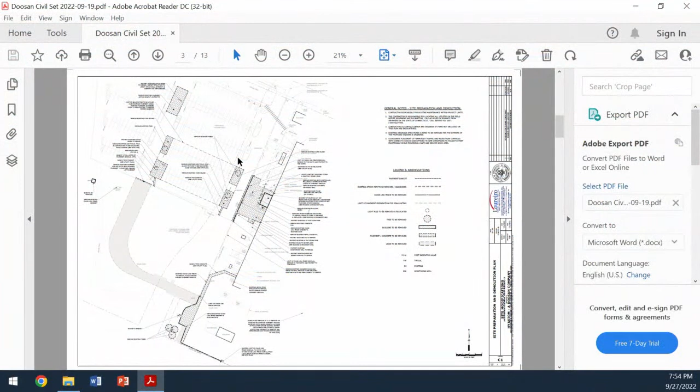To begin, I'm just going to show the existing conditions survey. So this is a little bit unique. Basically, the project area is divided amongst three adjoining parcels - 125, 155, and 195 Governor's Highway. But 195 is the property of the subject building. So basically, we're in the I, the industrial zoning district, and this just shows the existing conditions of the site.

So just real quick, the 125 parcel is a majority of the existing parking lot and the lawn area to the west. The 155 parcel is this narrow strip - basically the eastern drive aisle of the parking lot, which opens up into the rear of the property where there's some woodlands. And then the 195 parcel is the small amount of pavement directly adjacent to the building, as well as the Doosan building and then the eastern parking lot, which is off the view of the sheet.

So for the existing conditions, we have a large asphalt parking lot, some small landscape islands, existing lighting out there, and an existing on-site drainage system within the parking lot. It has one outfall to the existing municipal storm sewer in Governor's Highway, and it has one outfall that goes to the west, which is presumed to go to the surface water west of the property. And this area here is currently lawn, and as I mentioned, beyond here is woodland.

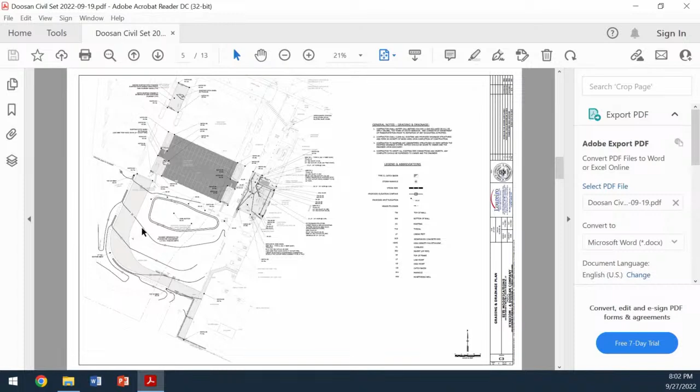As I mentioned, we did incorporate the stormwater quality measures, and there's no changes to any other outfalls, or any addition of new outfalls. We're just basically tying into the existing trunk line with our new drainage system. And the grading in the lawn area has been graded to pitch to that basin as much as possible. Whatever does not enter that basin will just continue to sheet flow into the parking lot as it currently does today.

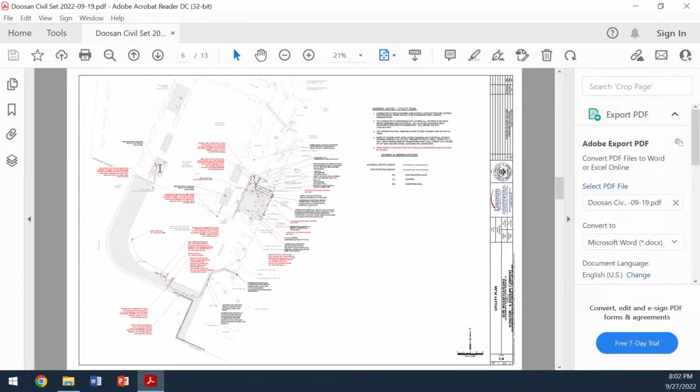Utilities, this is pretty limited. We're just going to be showing conduit for new light poles. We have 2 light poles here that were formerly inside the landscape islands that we're removing, so we're simply picking those up, relocating them directly across from their current locations to the edge of the pavement. Then we're incorporating several other new light poles to illuminate the driveway area, as well as the new loading area. We also have 4 building-mounted fixtures.

The site lighting is the exact same fixtures, the exact same pole height, the exact same everything, even the same lighting consultant and the same distributor as the poles and lights that are currently in place on the property. So we're matching those exactly in kind to a T.

We are just relocating a PIV for fire protection just to allow us to accommodate the new cooling module pad and the new grade wall. But that's simply a relocation from the building connection. And just ancillary conduits for the gate controllers for the slide gates and communications for the intercom systems associated with those gates.

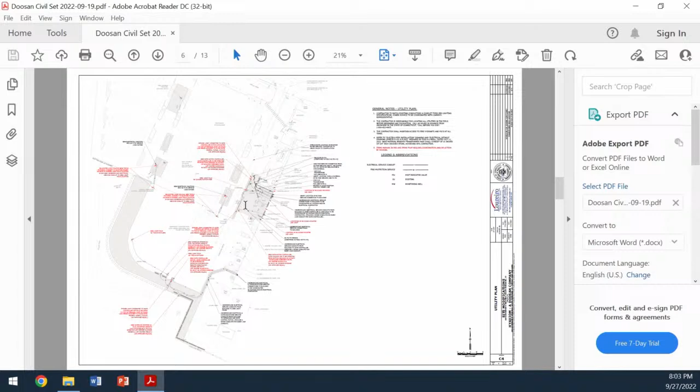This is the erosion sediment control plan. As I mentioned, we did already obtain approval on this from the Conservation and Wetlands Commission. It's basically just a standard plan - we have perimeter protection, compost socks along the down gradient portion of the work area, erosion matting on the steep slopes, designated stockpiling locations secured with silt fencing, and silt sack inlet protection on all new or existing catch basins that are within the project area and will receive runoff from the work area.

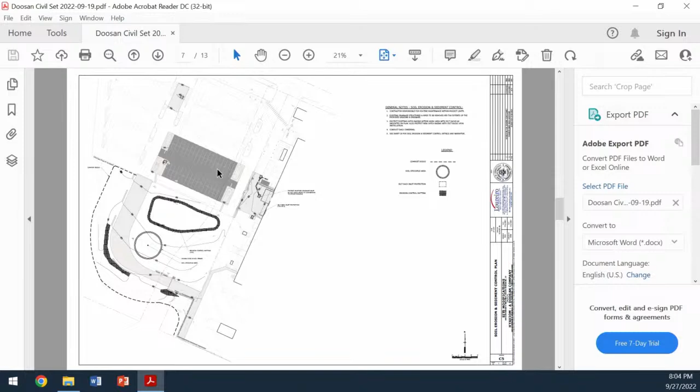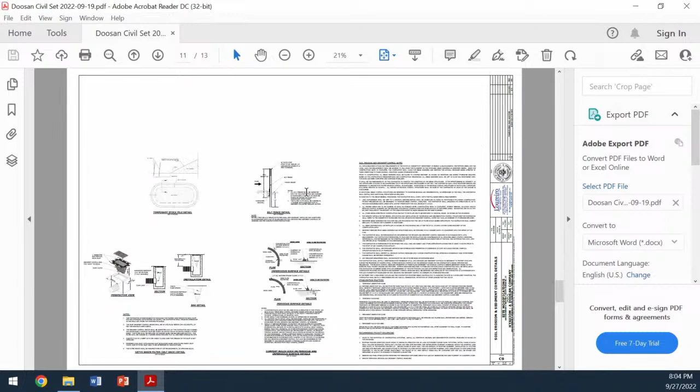These are just some standard construction details. I won't go through these in detail, but it's basically just showing you the different components of the project and how they're going to be constructed. This is just an example of some of the equipment that we're going to be implementing.

And this is the site lighting plan. What we had the lighting consultant do was analyze the entire work area and incorporate both existing and new poles into the analysis. The intent here was to demonstrate that we don't have any exceedance over the property line of 1/4 of a foot candle in accordance with the regulations, and this plan demonstrates that we do not.

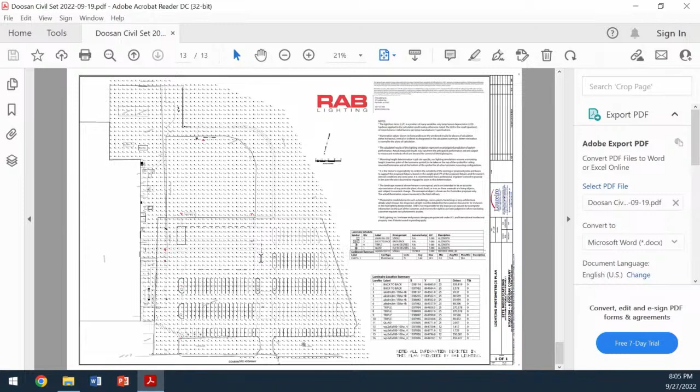So that's the site development plan set. I also can go through quickly the drainage analysis if that's something you'd like to see. I'm not sure if that's typically needed. Okay, so if there's any questions, I'd be happy to answer them, but that completes my presentation. Thank you very much. At this time, we'll turn to our Director of Planning, Michelle Lipe.

This is a request for a site plan modification to construct a driveway connection and new truck loading bays on the western side of the existing building at 195 Governor's Highway in the industrial zone. Minor modifications are being proposed to the parking area on the western side of the building to accommodate a new truck loading pattern going into the building. This is a new project, my understanding, for Doosan that will be working in this area of the building. So the overhead doors will be added and internal modifications will be made inside of the building to accommodate the truck unloading.

There's currently some existing outside storage in the area of this proposal. They have been relocating that onto the eastern side of the site, in the same location as the field we saw with the previous application. My understanding is this product is waiting to leave the site to be shipped off-site, so it's a temporary outside storage situation. But all the stuff on the western side will be relocated to the eastern side, unless there's some additional storage on the western side I saw out there. I'm not sure if that's staying or not. Maybe the applicant can clarify that for us.

The site is made up of 3 separate parcels. We have a zoning analysis that takes the 3 parcels and breaks the zoning down by the different uses. It shows the coverage collectively at 44%. We allow up to 65% coverage.

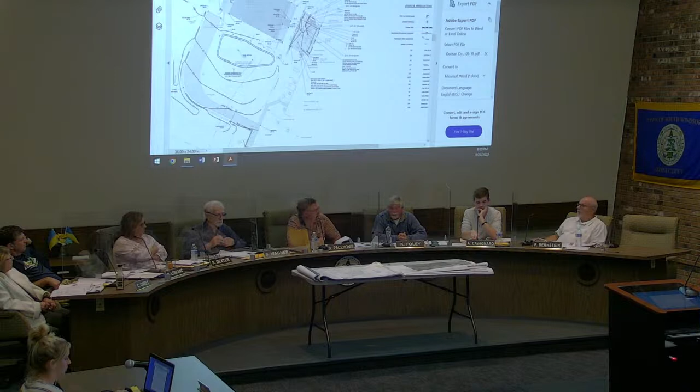At this time, I'll turn to commissioners - Commissioner Cavagnaro, Commissioner Foley, Commissioner Wagner.

Yeah, I think I understood your comments. I was going to bring up the same thing - isn't there normally an actual overflow feature where the water goes into a drain, into a storm sewer? In many cases, but not in all cases. In this case, the drains it would go to are in the parking lot. So that's why I'm suggesting they create a little berm around most of the basin with an opening towards those catch basins in the parking lot, so the water will go towards those basins. It'd be kind of on the northeast side of the basin.

Okay, right, so you're just looking for a designated overflow location to concentrate it towards the catch basin, as opposed to spreading out into the parking lot. You don't need an outlet structure with a pipe? No, it's too shallow to have an outlet structure. Right, it's just like a weir to direct it to a designated spot. Yeah. Okay, and I think we brought up the idea of a 100-year flood, but things are changing now - 100 years seems to be happening more often. I'm wondering if we shouldn't ask for a little more capacity in that.

Well, our standard right now is a 100-year flood. We don't have any good data to specify something more than that. We're looking at currently what the rainfall data is showing. The rainfall data has changed, and it's been updated by USGS and other entities.

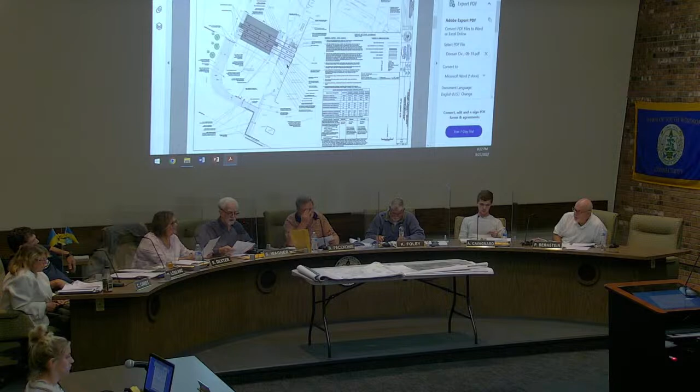Commissioner Wagner: I move we approve application 223233P, High Axiom Site Plan. We have standard conditions 1 through 11. Condition 3 says this application is subject to conditions of approval of the Inland Wetlands Agency Conservation Commission, including bonds in the amount of $5,000 to ensure compliance with erosion and sediment control measures, and $5,000 to ensure establishment of a stormwater system.

And then I think the one thing we would add to the standard conditions is to replace the dead trees. I guess Commissioner Dexter would like to add that we're going to replace 3 dead trees with - I guess I don't say what with. We were talking about, Commissioner, 3, 2.5-inch caliper Bradford pear trees. How's that sound? Sounds great. Couldn't hear too well, but okay, thank you. And that would be number 12? I accept that one, and then Commissioner Dexter, I didn't understand what you said.

I'd like to add another condition of approval, to create the overflow spillway so that the excess retention basin water does flow to the parking lot drains. We talked about it, but I don't think it was a condition. Well, it could be addressed as accepting the town engineer's comments of September 27th. Chair, we can do it that way too. Okay, I didn't see that condition on here.

Okay, so does that complete your motion? Yes, it does. Okay, we have a motion. Do we have a second? Second. We have a motion and a second. Any discussion, questions, comments? Hearing none, all those in favor of the motion, say aye. Aye. Those opposed? Motion passes unanimously.